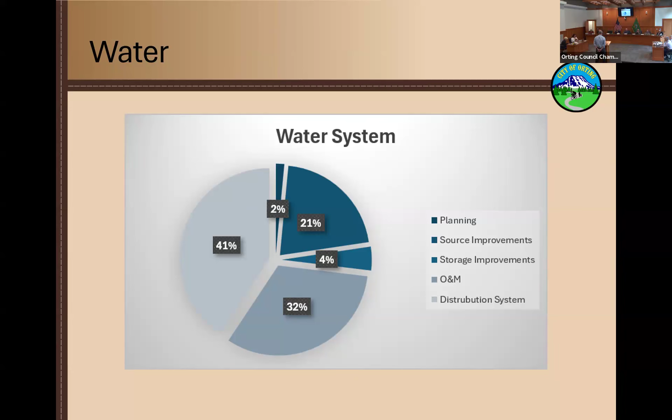So on the immediate needs side of things, like I mentioned, this is looking at current date to 2028, so the next few years. The telemetry master plan is something we've talked about here at council as well as with staff. That's updating your SCADA and telemetry. It's a plan where you would be looking to standardize that across your utilities. So it's not actual construction, but it's deciding what components are going to go into telemetry, which is your communication aspect. And then SCADA is actually your controls aspect.

When the operator goes into the individual system, they see what's going on, like level sensors on a reservoir, aquifer levels, etc. Disinfection upgrades, which is when we pull the water out of the wells, the city uses chlorine to disinfect the water, which kills microorganisms and bacteria in there. So there's various disinfection upgrades that are shown in your CIP in front of you at the various sources.

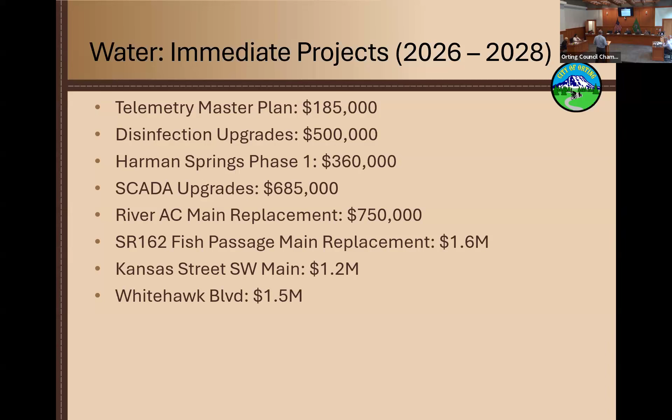Near-term projects, like I said, I highlighted those around 2029 to 2031. So that's the next 3 years of capital planning. You have to go through another risk and resiliency assessment. So that is a federal mandate. You're currently going through certification years right now. The next cycle will come up in that planning horizon at a cost of about $158,000.

I showed you on the first slide, Well 2. So Well 2 is an older site. It's not currently connected to the city's distribution system. And as we've gone through modeling, talked through with city staff about resiliency, and if you were to have an event where you had a disconnection of pipes, having Well 2 reconnected to your system really helps reinforce your water system on a pressure, resiliency, fire flow standpoint.

So you've got the water right there. The cost to rehab that and then increase the pipe sizes to connect that to the distribution system to get that increase in pressure is about $6.8 million. A few more disinfection upgrades at your sites to update those chlorine monitoring and pump systems. Additional SCADA upgrades at a cost about $700,000.

Another thing in there that was identified as part of your risk and resiliency assessment is adding additional distribution valves in your distribution system to give you a little bit more flexibility if we have a seismic event within your system and we have broken pipes. Right now, the valves aren't really reliable in the way that there's not enough there. And some of them just are old and won't fully seat.

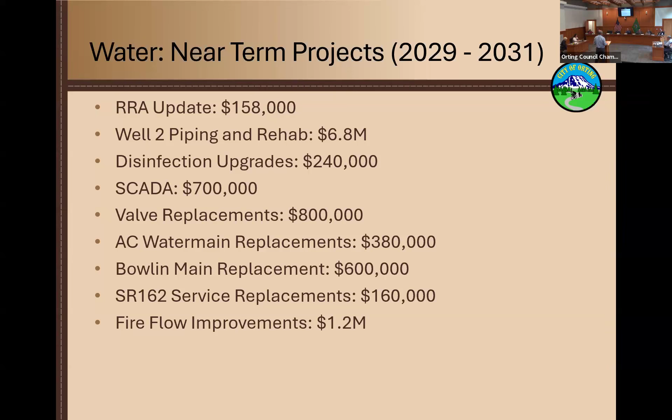Longer term, these are the 2031 through 2045. So likely outside the horizon of your current rate study, but there are longer term projects that are just out there that have been identified through the water system planning exercise. 10 years from now, you'll have to go through another state mandated water system plan and another federal risk and resiliency assessment. So those are lumped together in one planning year of $550,000.

As I mentioned, that 2-phase program project at Harman Springs, it comes up in that planning horizon of $2.1 million. Wingate Springs Reservoir, you saw that on the first water slide, a cost of seismic retrofit of about $600,000. And then well 1 seismic retrofit is a square concrete reservoir here in the city that has shown cracking over time. So showing a seismic analysis and retrofit of $1.8 million on that one.

Additional valve replacements throughout the duration of the CIP at a cost of about $1 million. And then additional AC water main replacements at $1.5 million spread throughout. So that's not one large project. It's getting a few done every few years.

The Wingate main replacement and the SR 162 main replacement combined at a cost of about $11 million. So that is replacing your water line from essentially city limits all the way out to Wingate, all the sections that aren't replaced as part of that SR 162 fish passage project. That is also part of your franchise utility agreement with WSDOT.

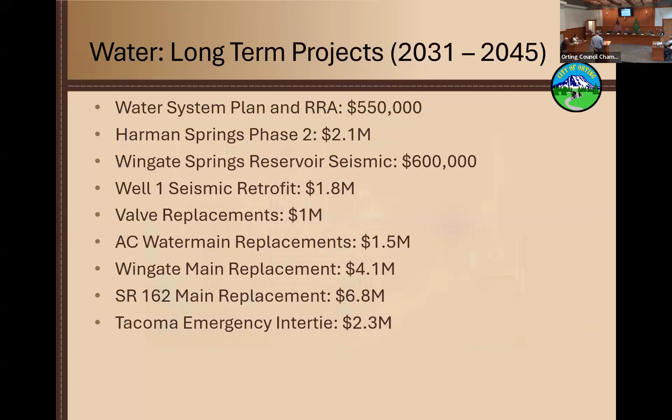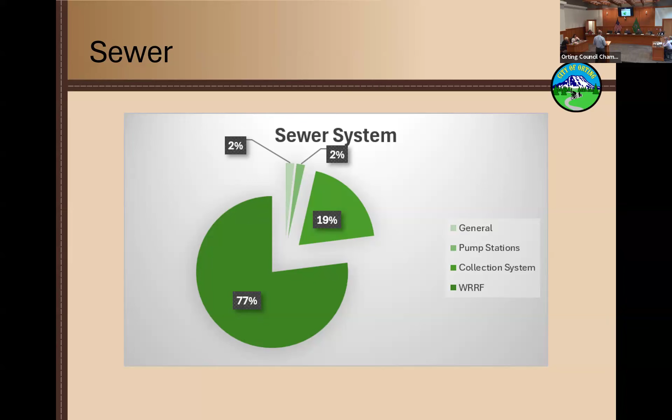So next I'm going to talk to you about sewer. As I mentioned early on, sewer's got the highest capital needs. Breaking these down into the categories that Wilson Engineering broke them down: 2% on your general, 2% on pump stations, and then 19% of your CIP costs within your collection system, and then 77% at your treatment plant or water resource reclamation facility, excuse me.

So immediate needs within the sewer system up to 2028 include a flow monitoring study at a cost of about $155,000. Replacing the pumps at the Village Green pump station. So within the Village Green residential development, there's a sewer pump station, the pumps are of age, and there's a capital cost of about $382,000 to replace those pumps in the hole itself.

So in the wet well, that pumps out to the collection system because it's too low in the collection system for it to flow by gravity to the treatment plant. So it flows by what's called the force main all the way to the treatment plant from Village Green. Those pumps are aged out. They're no longer efficient and not pumping. So through the general sewer plan, it was identified that they should be replaced.

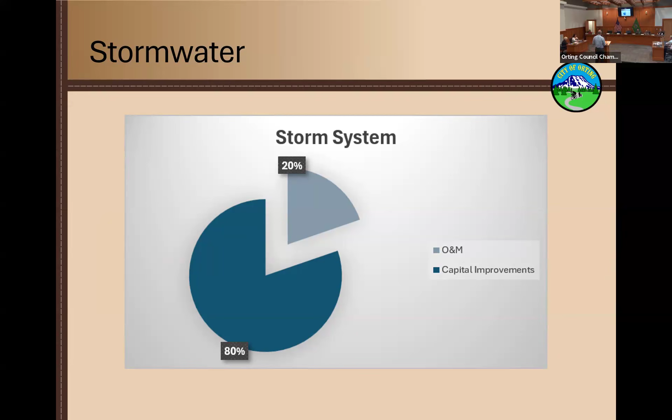So immediate needs are a lot of projects that are ongoing right now. So Whitehawk Boulevard, the design of that roadway would have a $2 million storm improvement associated with that. You see Kansas on there as well at $661,000. Rainier Meadows storm pond retrofit at $900,000. So the storm pond back over here at Rainier Meadows, the city was required to go through what was called a SMAP. And it's an exercise to look where some improvements can be made within your system. That was the project that was identified with city staff, retrofitting that storm pond at $900,000.

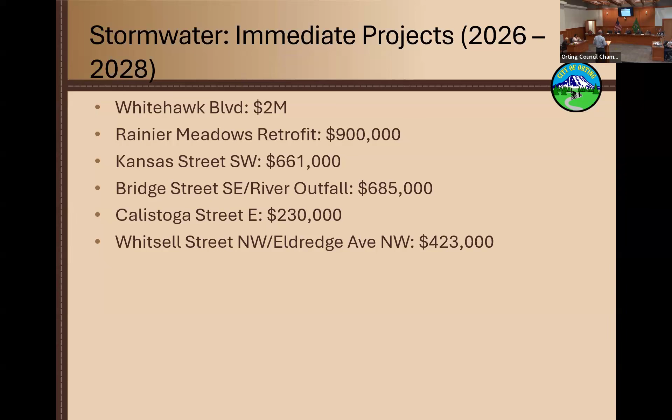Bridge Street Southeast and River Street outfall at $685,000. Calistoga Street East drainage improvements, $230,000. Whitsell Street Northwest and Eldredge Avenue Northwest drainage improvements, $423,000. A lot of these, what you're going to see on the stormwater side, are through the modeling exercise. We see flooding nodes where during a 25-year storm event, we start to see water not getting into the system, and it surcharges those catch basins. That's where you see water standing in the roads, or there's not a system altogether there, and adding a system so you get better drainage within the levees here.

Near-term projects, additional outfall at the Orting High School at $1.1 million. As we're talking with the developer, depending on timing, that's something that sometimes can be a partnership with your developers here in town. Calistoga Street East stormwater improvements, $380,000. Ammons Lane and Whitsell Street, $790,000. Corrin Avenue, $465,000. There's also some ongoing things in there on the management side of things.

The stormwater management plan is something that, per your NPDES permit with Ecology, you have to maintain, and that costs you about $100,000 a year. And then just general runoff control from developments, construction, etc., at about $220,000 a year. That's reflected in there. We put as much ownership as we feasibly can on our developers to control runoff, but sometimes there's additional components of that that are required of the city.

Long-term projects, Corrin Avenue Southeast, $1.8 million. Additional culverts and outfalls at the water reclamation facility at $1.3 million. And then those last two, once again, are repeated: the stormwater management plan at $100,000 a year and runoff control.

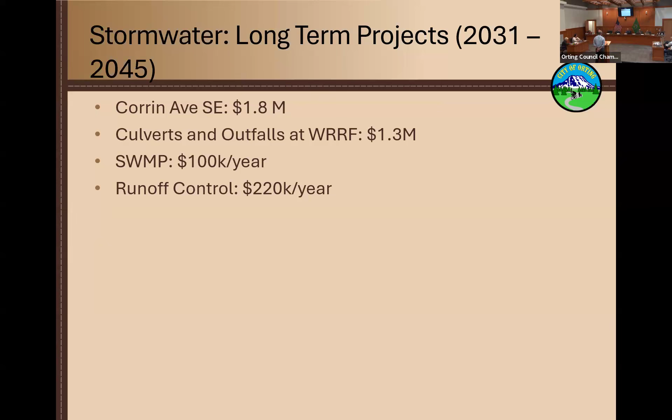So looking at your combined CIP, immediate projects combined add up to a total of about 14%, or $26.2 million. Near-term projects, $42 million and 22% of your CIP, and then longer term, $122 million or 64% of your CIP.

So how do we pay for all this? That's always the question, right? So obviously, as I mentioned at the beginning of this presentation, your rate consultant's working really hard on this, and we'll put all these into a model and then present a rate structure for you to consider. One thing to do is consider delaying projects, modifying projects. Some of these, unfortunately, are mandated by your permits and things like that, but we can do the best we can to keep those costs down.

On the drinking water side of things, what you have in front of you for grants and loans that are readily used by the city are the Drinking Water State Revolving Fund, DWSRF, Public Works Trust. The city's had good success with those, typically on the loan side of things, and then obviously municipal bonds. Sewer side of things, once again, rates, grants and loans. Ecology has a great grant and loan cycle.

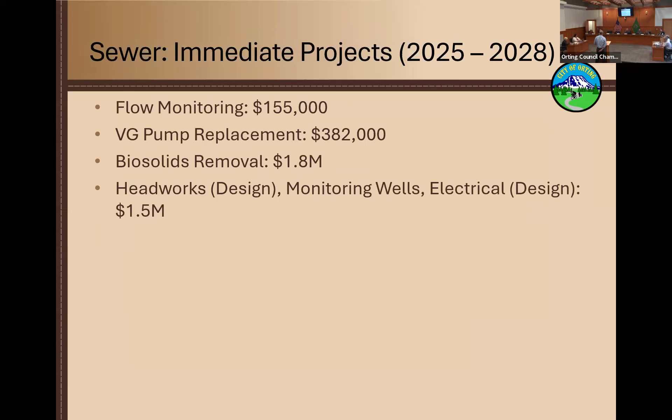The lab building, we need to get that upgraded too, correct? Yeah, it's shown on. Last one on here, lab and operations, $2.3 million. Okay. And then you said we would want to put an outfall pump station in. Would that be working all the time or only as needed when we can't gravity feed out?

I think that's something that's longer term on your planning horizon. Certainly one of those projects I would recommend analyzing how much you're gonna use it, versus you have EQ storage, equalization basin, where you could potentially store some of that discharge prior to an event. Depending on how long that event is, if your EQ storage is empty, you can fill that up during an event and take advantage of that. So, where do you want to spend the money type of thing? But it certainly is if you have a high river event. Okay, thank you.

And then how are we doing on our Village Green golf course outfall? Is that still an issue? You know, we had conversations with them, they didn't go very far, so right now it's just not a part of the project. Okay. It's just ongoing. They're just arching their backs on us.

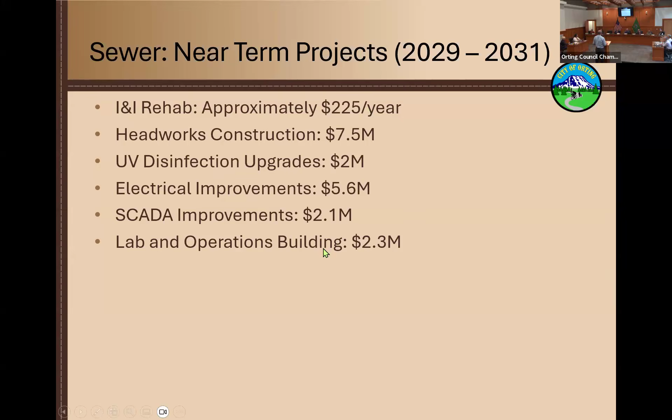Okay, Stanley Holland, any questions from you? Can you guys hear me now? We're having some audio issues. We can't hear him. I can see his subtitles and I'm texting him. Holding up a note. Okay. All right. Okay, thank you. If there are no more questions from the council, I'll open it up for comments from the audience. Yes, yeah.

You made the comment about taking gravel out of the river. Why did that? So the question, for those of you that didn't hear, was why can't we dredge the rivers and who won't let us? It's largely a permitting issue with critical fish habitat. They have identified the gravels as spawning beds, and I do know that Pierce County did a pilot study a few years ago, removing gravel above the ordinary high water mark, so those big high gravel bars. It was just a pilot study, and I haven't heard anything since then. So you cannot get a permit to do it. Okay. 5 years. I know they did it forever.

But what do you do when the riverbed gets a lot higher than around here? Setback levees. Flood wall. The city is literally lower than the riverbed, and you have massive pump stations to pump rainwater out. Is that really working all that great down there? No, it's not. Some are just our fault. Yeah. Well, then have we looked into this to see, no option of dredging the river?

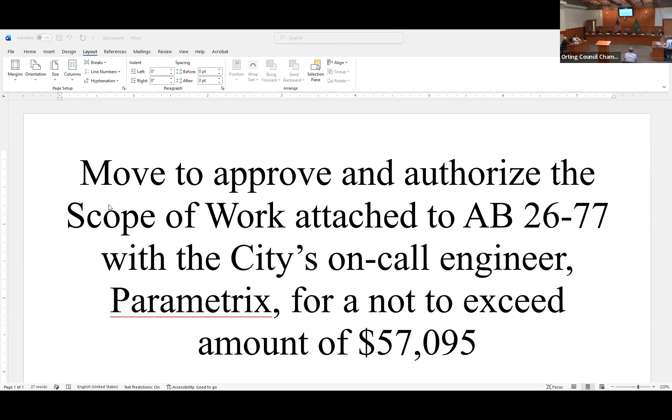Okay, Councilmember Tracy. Oh, it was to Councilmember Hogan. I'm gonna shoot for this right now. Move to approve and authorize the scope of work attached to AB 26-77 with the city's on-call engineer Parametrix for a not to exceed amount of $57,095. Second. Motion made by Councilmember Hogan, seconded by Deputy Mayor Sprawl. Comments or questions from council?

So this is just what Parametrix is going to do to get us started so we can go for the RFP, correct? But this would be the RFP, so we can go to bid. It would be bid documents as well. Bid documents, yeah. Prepare the contract, then bid, goes to the paper. Right. But that's what we're paying the 57 for, correct? That's correct, yeah. To get it to go out to bid. Yep, exactly. Okay, thank you.

Thank you. Councilmember Williams? So, for clarification, the 300 dry tons that we're talking about is getting removed before this RFP? That's correct. Yes, and if we can take more, we'll take more under the emergency proclamation. But right now we're looking at 300 dry tons is what they're permitted for that site to remove. And what's that cost gonna be? It's about 650,000. Yep.

Okay, Councilmember Tracy. I just, voting this in now, is it beneficial? In other words, you're kind of on high alert to get this thing run through. Yeah, we're wanting to get it going to get the Department of Ecology off our back. Okay. Then it'll be just a question of how much can we afford to remove at this time and get in good graces.